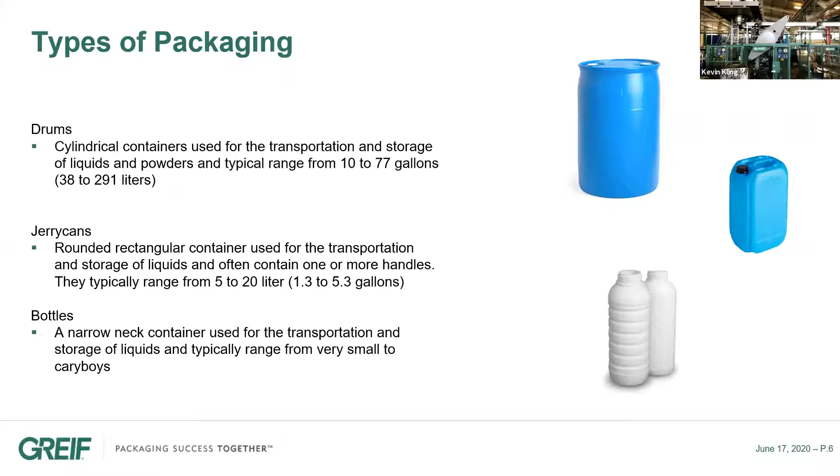Just the basics on the key raw materials. The first and most critical is the resin. I assume many of you have a car, and over time you've probably had to fix something, new tires, problem with the engine, brakes. But I suspect very few have ever had to fix their gas tank. The phenomenon is that your gas tank and our drums are made with the exact same resin, which we define as a high molecular weight, high density polyethylene. Sometimes we underappreciate the strength of that material, but it's really what gives us the foundation for the drum. Then in the case of tight heads, we have closures which screw internally.

In the case of jerrycans and bottles, we typically call them caps since they screw on externally. Then what we consider master batch is the colorant, or in the case of a natural drum, we put in a UV inhibitor to protect the polymer from degradation when stored in the sun. This gets into the question: why are most drums blue? When drums were developed around the 1960s, black was typically made from carbon black, which was non-FDA approved, and there was a lot of regrind and recycled material, so the purity wasn't there. Blue, on the other hand, was a low cost colorant that gave good polymer protection naturally. So it developed out of simplicity, and blue became the standard in the industry, and it's continued to be that ever since.

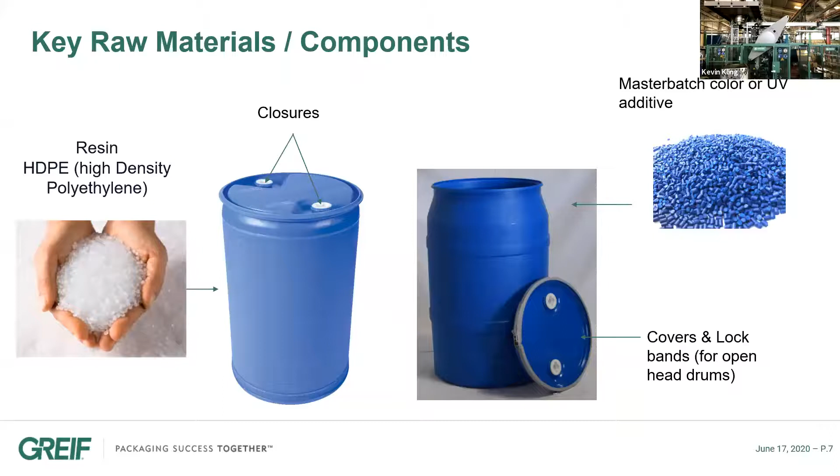Thank you, Kevin. So you already mentioned the colors and the fact that the majority of plastic drums are blue, covering around 80% of total production. But blue is not the only color we use for our containers, whether jerrycans, drums, or bottles. Blue, black, white, and natural are the four standard colors for the industries we serve. But we produce many other colors, because customers now want their brand reflected in the visual color of the drum, and we produce around 8 more colors beyond the 4 standards. This covers any customer needs and lets them follow their demand to be special, unique, and recognizable among others. We're able to do this without limitation, and in all sizes.

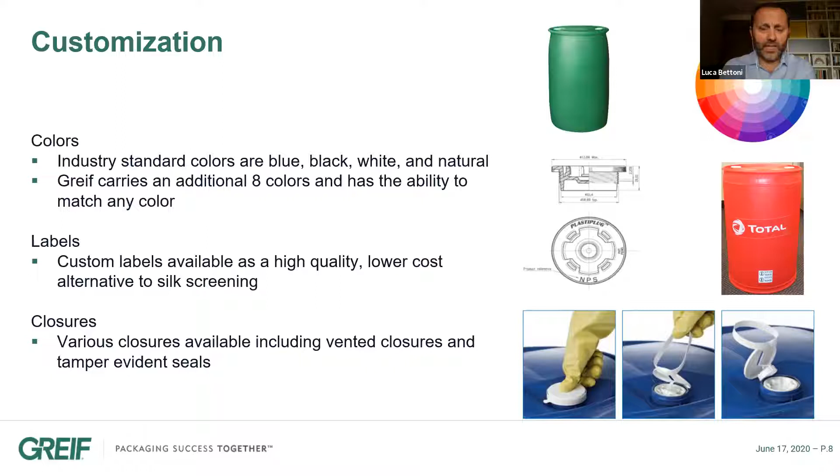Obviously, the drums can be tailored in other ways too. You can have special custom labels available that really brand the drums, as a lower cost alternative to silk screening. So you can also count on this special tailor-made request. Regarding the closures, there are many types available, with vent, without vent, tamper evident seal, and different types of necks and connections depending on the need of the drums.

The closure can be vented, as I said, because there are two typical effects on plastic products. There is the need for a vent out, to relieve internal pressure, because in some cases gas is created by the chemicals or product filled in the drums. There's also deviation in temperature, and an increase of temperature inside, especially under the sun.

And why venting the other way? This is to relieve external pressure. There are some solvents which need air from outside, or there's a difference in temperature when you're filling hot and then cooling down the product. If you close it at that point, there is the risk of implosion, and venting avoids this type of effect.

And then also why the vent during the use, because especially with the small packaging like jerrycans and bottles, which are usually used by hand, you need to have something to have a flow very smooth during the emptying. And this is why we have special inserts in our neck in order to avoid the product to have the glug effect and the waste of product as well.

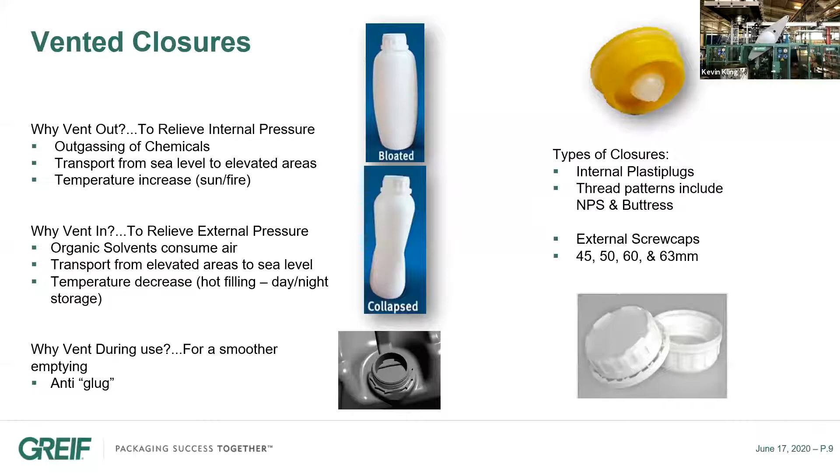Thanks, Luca. One of the most common issues we see here is hot filling applications. So that vent, oftentimes when there's a problem with the packaging or customers having issues, that typically is it, where we see a hot fill application not allowing the package to cool, and then putting the closures on and putting them in stacks. So various needs, but that would be the most common that we see.

Now we want to talk about the types of molding processes, as it really pertains to industrial packaging. And the first is blow molding, and we consider blow molding a process where we make hollow products. Really the key to blow molding is the air. The air is used to inflate a plastic tube and push it out against the mold. We're going to show this in more depth later. This is really the process where we're making our drums, jerry cans, and bottles.

The second process is injection molding. Injection molding is where we're making solid products. And contrary to blow molding, air is the enemy here. So if you get an air pocket in the product while you're molding it, that's going to ultimately create a brittle or a weak part in it. Common parts that we're injection molding would be caps, closures, plastic locking bands, and plastic covers.

The third process is extrusion molding. Extrusion molding is used to produce tubular products. Basically plastic is forced through a die, and as it cools, it can be cut or printed on. The most common product you think of being extruded is a pipe. But when we talk about one of our products later, the NexDrum and Valorx drum, we really combine extrusion molding with injection molding to create a drum in a different format, which gives it some key advantages.

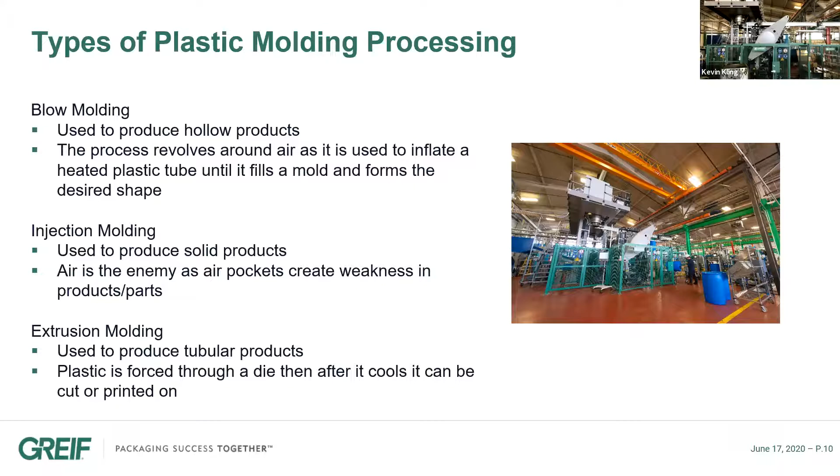Within blow molding, you've got your standard monolayer as well as a CoEx, and we define CoEx as a multi-layer application. There's different reasons why you'd want to use CoEx. Back to our example on the fuel tank in your car, that is actually a 6-layer CoEx blow molded package. The key there is they're adding one of the layers for permeation, to prevent the gasoline from traveling through the plastic to the outside.

Another application, and one that Greif is very excited about, is using it with PCR, which we define as post-consumer resin. This means when we're collecting drums and IBCs, and we know exactly what was last contained, we're able to take and sub-select from that material, grind it up, and repurpose it back in the middle layer of a drum, and then we encapsulate it with virgin material. This allows us to create a very nice sustainable story, and also prevent some of the traditional issues with using PCR, such as the smell.

Another application is purity. So you may want a drum that has no colorant in the inner layer, and with multi-layer technology, we can do this. The last would be if you needed higher environmental stress crack resistance. For example, you could get the strength of the drum grade material, but use an IBC resin in that inner layer.

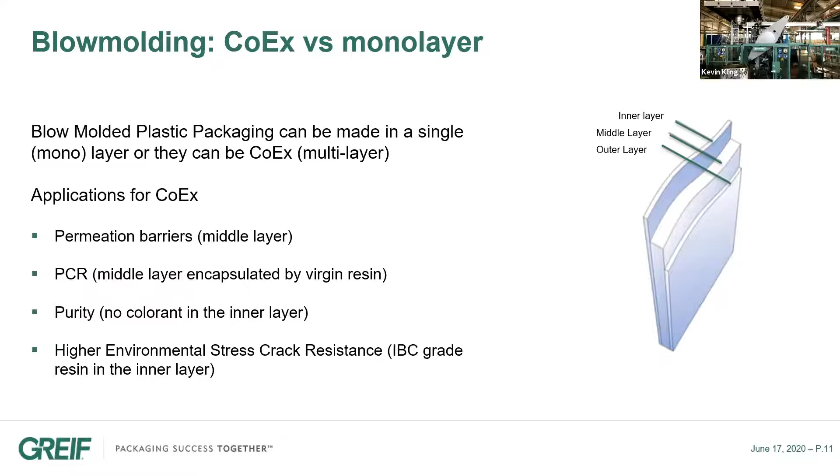So over the next 4 slides, Luca and I are going to walk you through a cartoonish look at the actual blow molding process. The reason we want to do this is after that, we're going to show a video of the process from molding through the quality checks. One of the limitations you'll see is a lot of the process, when the mold closes, you really can't see what's going on. So this just gives us a quick opportunity to first show you so you know what you're looking at.

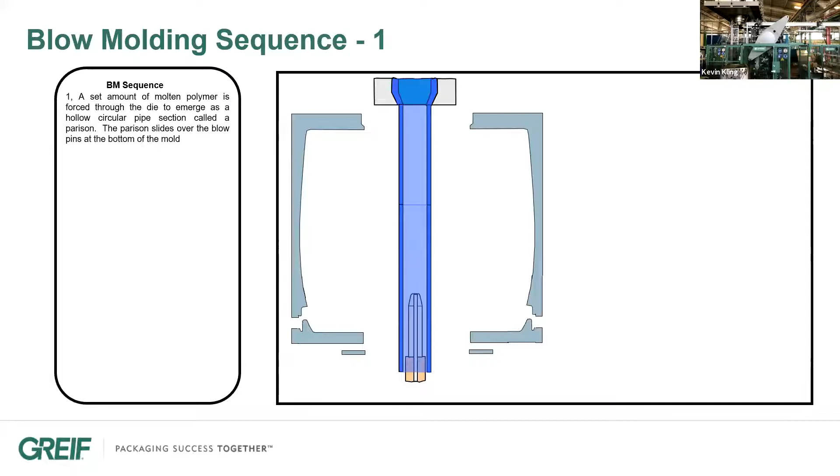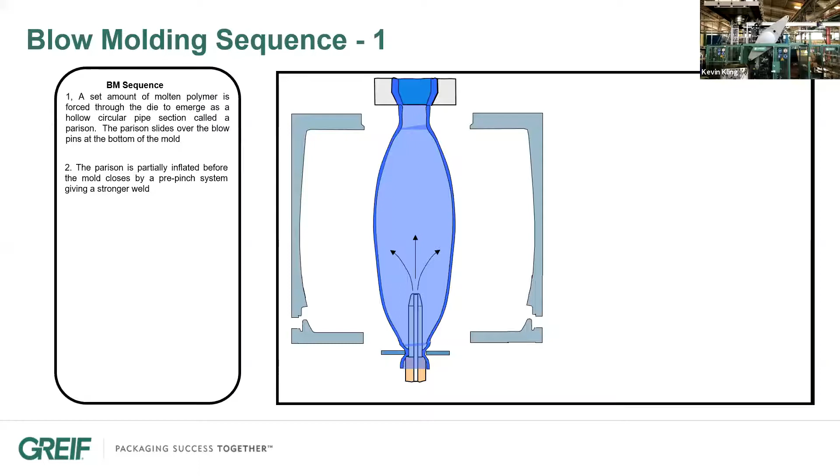The process starts as the resin and the master batch are heated and mixed together in the screw, and then they're forced through a die, coming down what we call the parison. The parison goes over the blow pins, and then the blow pin gives a pre-blow in order to help spread the material in the key areas we want. We're not making a ball, we're trying to make a cylindrical drum. In order to do that, you've got to force material into certain key areas to keep the weight of the drum down and get the shape we desire.

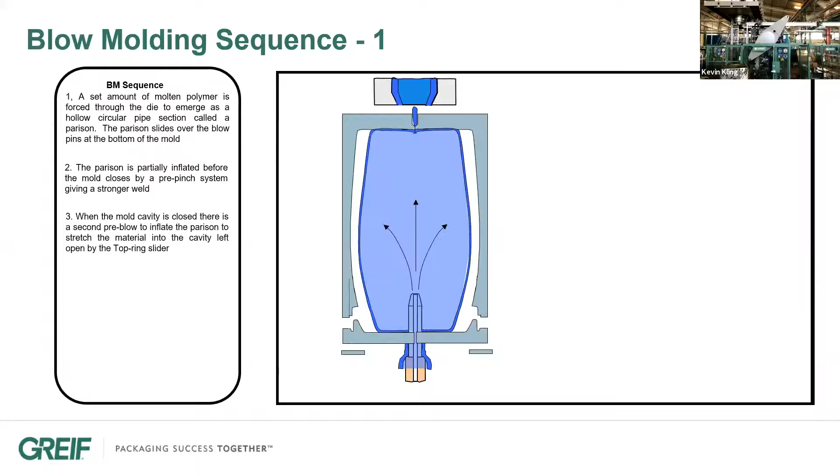At this point, the top ring slider comes in, and we're going to continue to add more air, and we're going to start to blow it into the shape you know as a drum.

Now, one thing you may notice is the drums are produced upside down. Second, the blow pin - in the case of an open head, you'll have one center blow pin. In this case, we are making a tight head drum, and so while you can't see it, picture that there's one blow pin behind the one you see. That serves two purposes: one is to help blow the air into the drum and expand it, and secondly, that's how we form the threads for the closures, so in the end it's going to end up unscrewing.

At this point, we're going to close the compression ring and form that top chime, and the drum is essentially the shape you want it to be. Now there are different processes - some machines are continuous extrusion, some are accumulator heads, so there's some subtle differences in the process at this point. In this example, the mold is going to be indexed to the side to allow the cooling process to occur. In other applications, it may stay in place before the next drum is started.

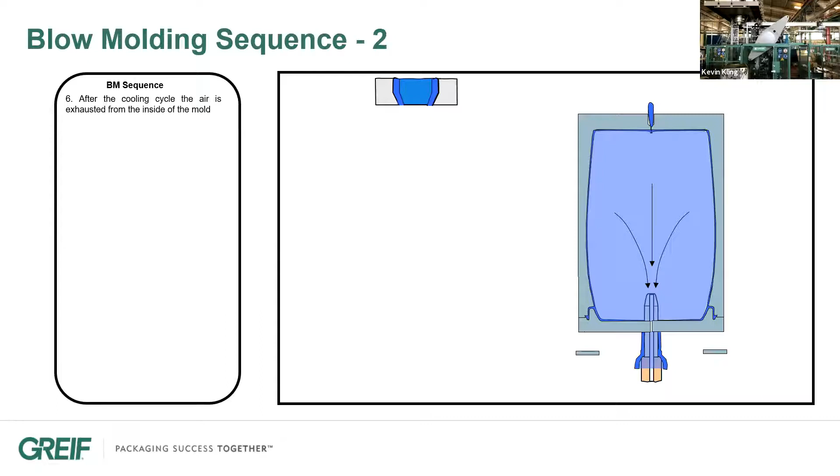So we start to reverse the process. We're trying to exchange the hot air in the drum with cold air. At the same time, we are circulating chilled water through the mold, as everything is about trying to take it from 400 plus degrees down to ambient. The quicker you can do it, the faster the cycle time.

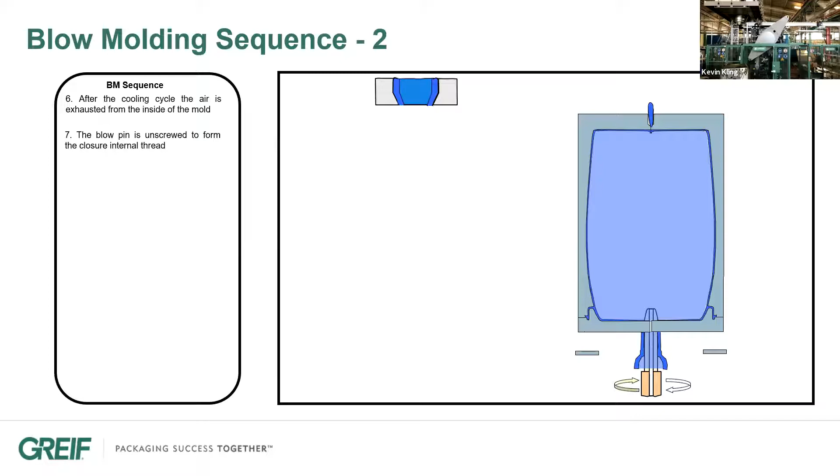The blow pin now gets unscrewed, forming those threads and making sure that we don't compromise them. Then we're going to start to open up the top slider, and at this point you'll notice that the flash on top is handled by a gripper. In the case of automation, you may automatically deflash it - when we show the video of the drum, you will see this process. In other applications, the drum just may get dropped at this point, and you've got an employee taking the drum and manually deflashing it. It just depends on the product and the application.

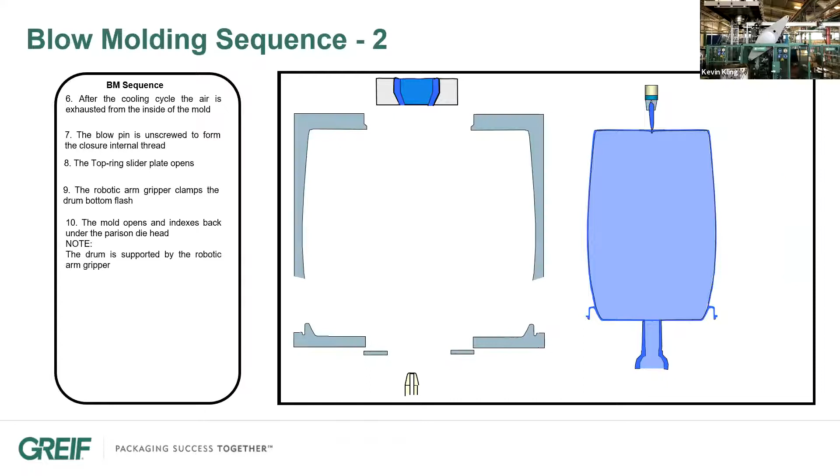Mold opens, and then basically we start the process over again.

So that's the basic process. Now Luca is going to take you through two parts: one is the inline testing that we're going to do once that drum comes off the line, and the second part is going to be just talking about the periodic standard UN testing.

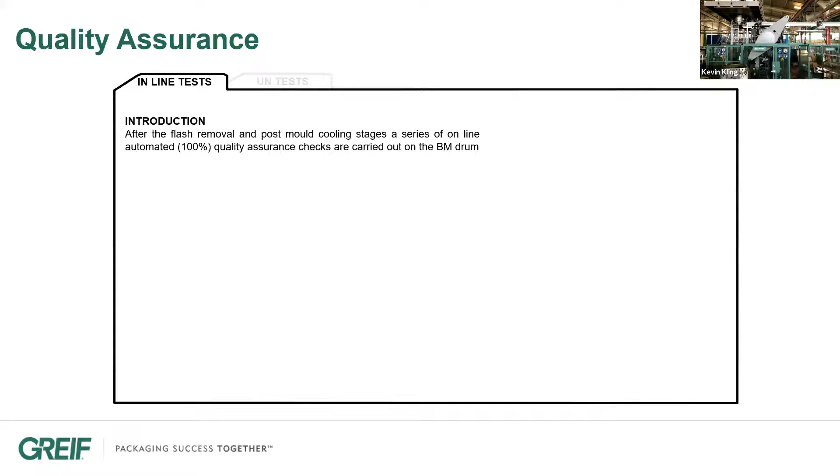Yeah, thank you, Kevin. Once produced, our product is now time to check and be sure that everything is what our customer desires to receive. First of all, we are checking 100% of our product before it's shipped to our customers, and we have different types of tests that we do on every single piece that we are delivering to them.

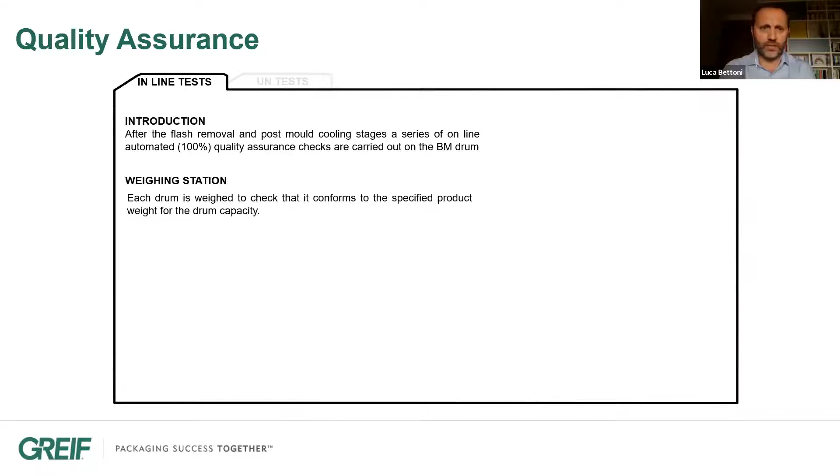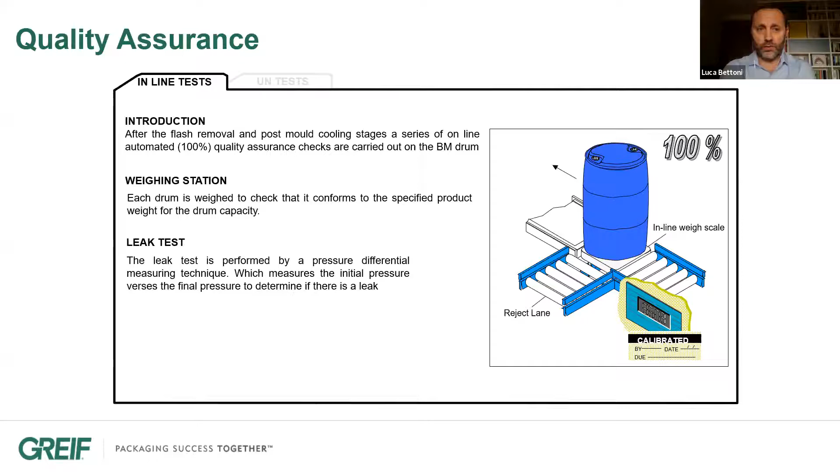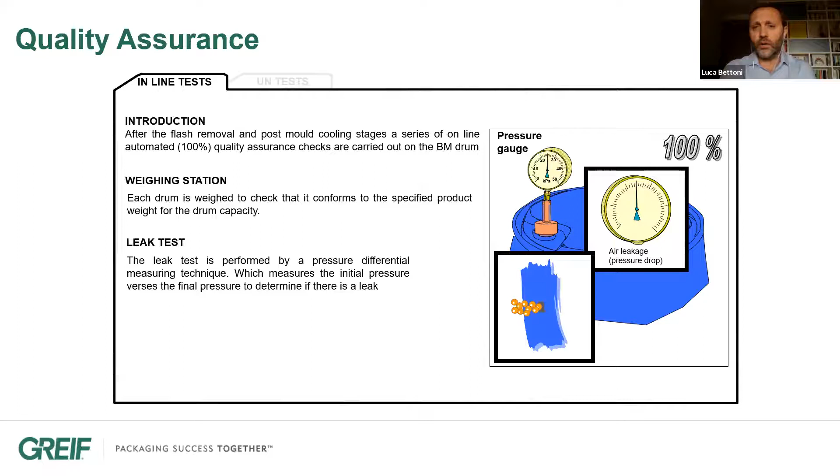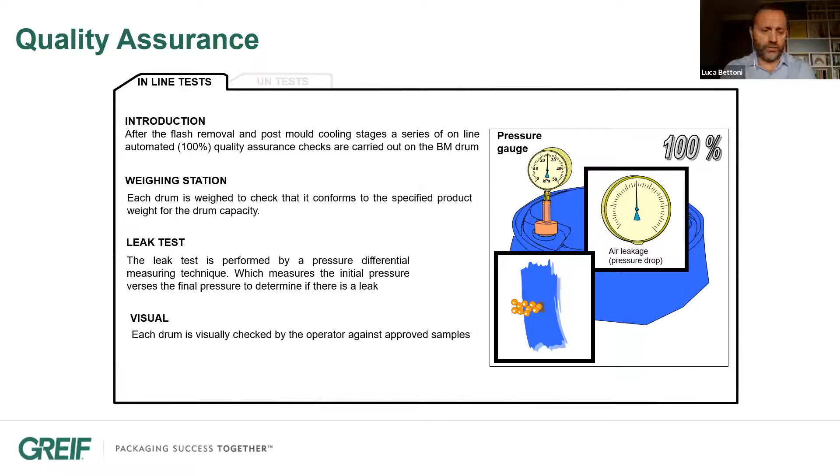For sure, those types of tests are not destructive tests, they're just checking tests. So we are measuring the weight of the product, because this is very important - we want to be sure that every single piece is the right weight needed to resist and make the mechanical performances of the usage for our customers. And then every single piece is also tested at the leak test. We have an internal pressure, and we are measuring the pressure differential in order to check if there are micro leakages, and to avoid leakages from your product, in order to be sure for you to fill and ship without any risk of losses of your product.

And then we have also a visual check, which is very important, by the way, because in this case we need to see if there are no flashes still linked to the drum that can create some problem, especially in putting the cap seal on the neck, for example. And then if there is no discoloration of the drum, in order to have a visual effect which is in line with the expectations of our customers. And then if there are no distortions or visual effects on the surface of the product.

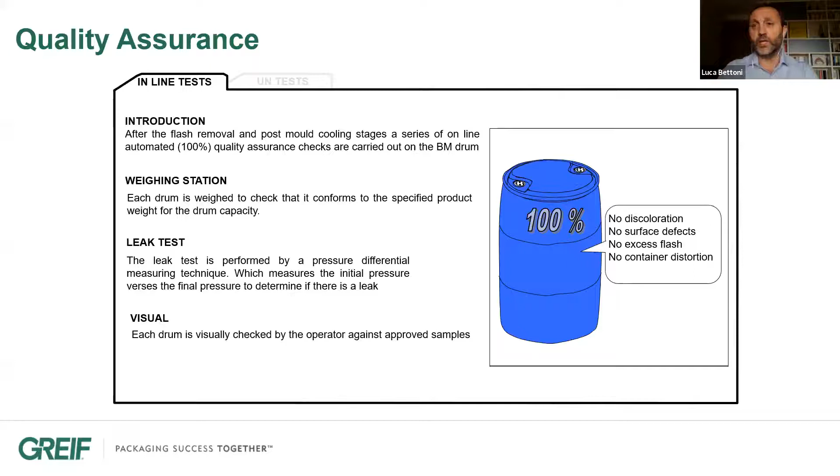So this is really for checking that what you are receiving is exactly in line with your expectation and what you need to do with our packaging.

Then there's something different we're doing with the UN test. The UN tests are basically disruptive tests, to check if the performances considered ideal for the drums or jerrycans we're delivering to our customers are indeed in line with the performances we need to achieve.

There are different types of UN approval levels. What is produced in plastics is identified with an H. For example, a tight head drum is identified as 1H1, or an open head drum is identified as 2H1 or 1H2, depending on the type of product.

There are different levels of UN test based on the packing group of the product that must be filled. Packing group 1 is linked to an X UN approval, which is the highest level. Packing group 2 is a Y, the medium level. And packing group 3 is a Z level.

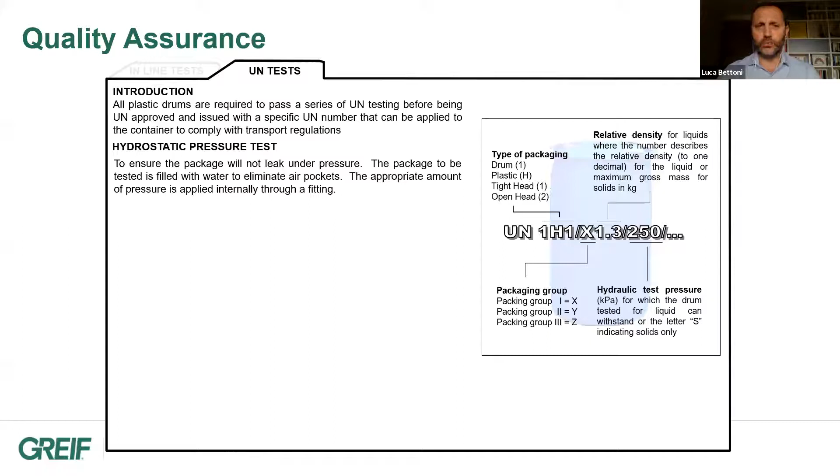So all of our products are basically tested for packing group 1 and packing group 2, including packing group 3. One of the tests is the hydrostatic pressure test, because we blow the product under pressure, and the product must resist a pressure of almost 1 bar for around 30 minutes without any leakage of the water contained in it.

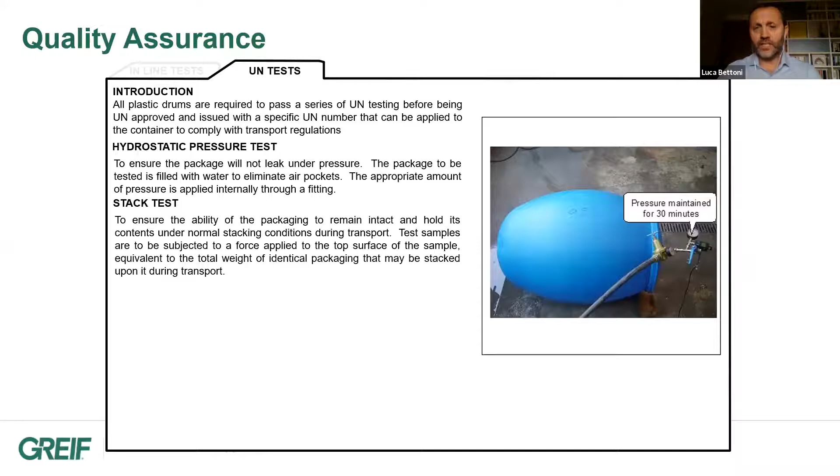Then we run the stack test, to see the ability of the drum to resist a weight, because most of our products are designed to be stacked during transport with product in them. We need to resist for 28 days at 40 degrees in this stacking condition, measuring the weight we need to resist, which is linked to the type and size, from 1 liter to 220 liter packaging.

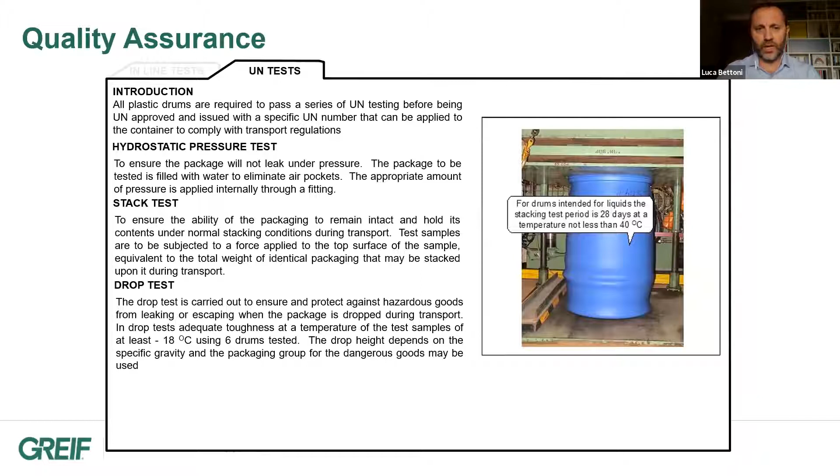The drop test is the final one, because it's a very strong and disruptive test. Usually the plastic is conditioned to a very critical temperature, minus 18 degrees Celsius, in order to bring the polyethylene to the level of maximum critical condition.

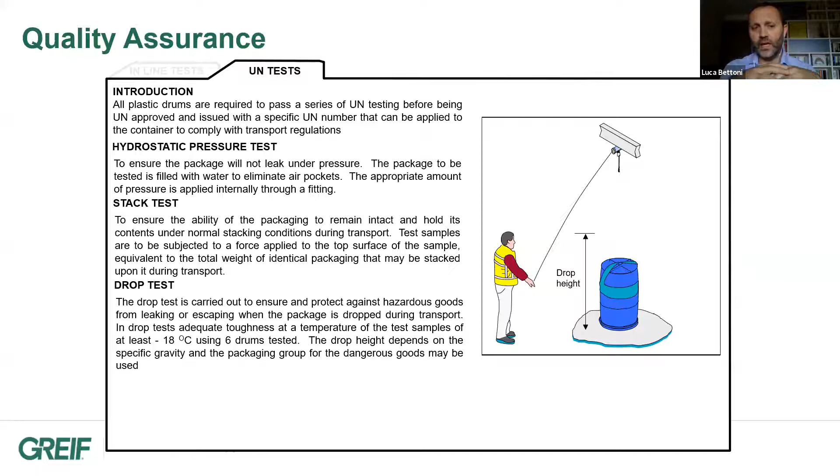Then with glycol on it - a liquid that remains liquid even after conditioning at such low temperature - the product must fall from a different height depending on the packing group you need to achieve in terms of UN approvals. For example, for packing group 1, we need to resist a drop test even close to 1.8 meters, so this is absolutely a very, very strong test.

And this is valid for all types of packaging, including IBCs, by the way. There are also different angles that must be considered for the drop test.

Most of those tests are usually made with water or glycol, like the drop test. But before that, the packagings are conditioned with the 5 standard liquids, to check the chemical compatibility of our product with what our customer needs to fill. We consider the conditioning, and the plastic must resist those tests after a certain time of conditioning, where those chemicals have time to attack or, in theory, create issues on the polyethylene. We need to resist also in this case.

Those 5 standard liquids, I would say, cover 80% of the total chemical products. For some products not linked to standard liquids, we run specific UN approvals depending on specific liquids, to be sure we are covering other products not linked to what are called assimilation products.

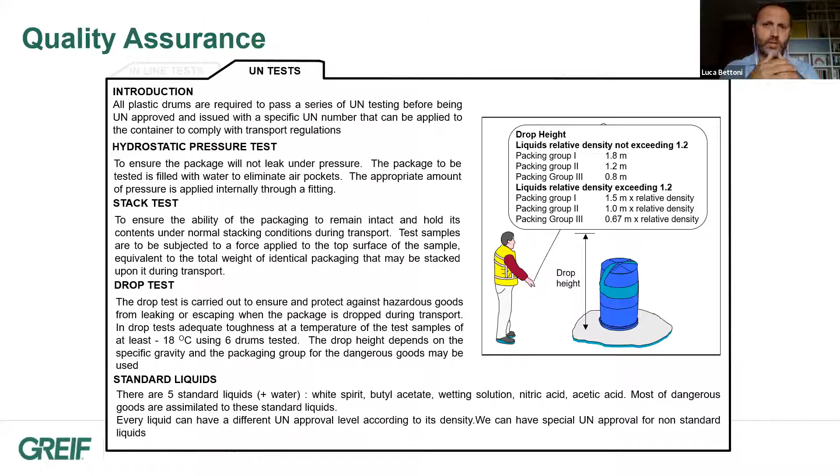So you can ask and reach out to us in case of special needs, and you can also ask at any time your account sales manager for indication about the assimilation between your product and the packaging you would like to use.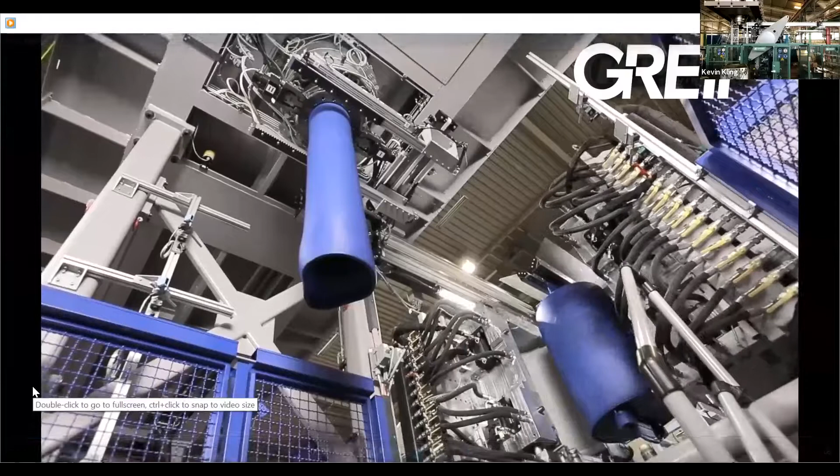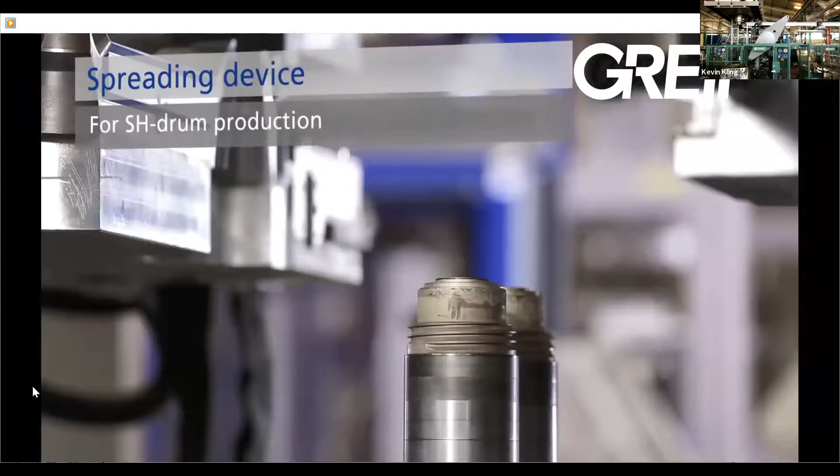Again, we wanted to share with you that Greif invested last year in 2 new state-of-the-art 3-layer Kautex blow molders. Here we're showing one of those blow molders in process. This is still at Kautex with full automation, but it gives a really good depiction of the process, as you can see the drum being made.

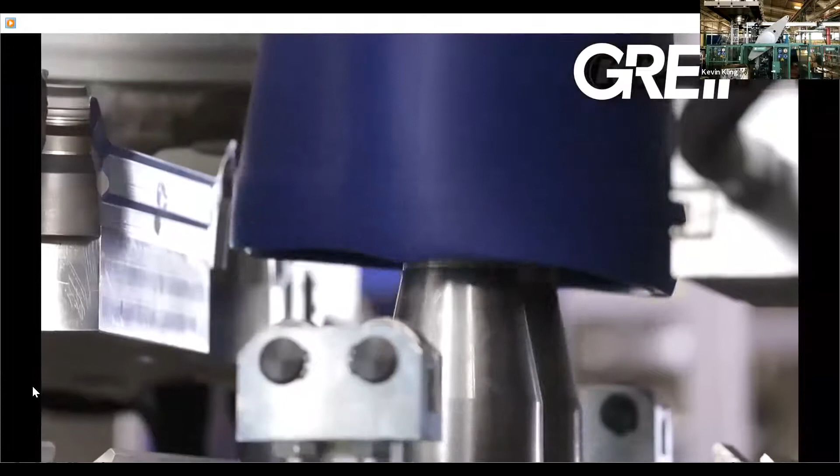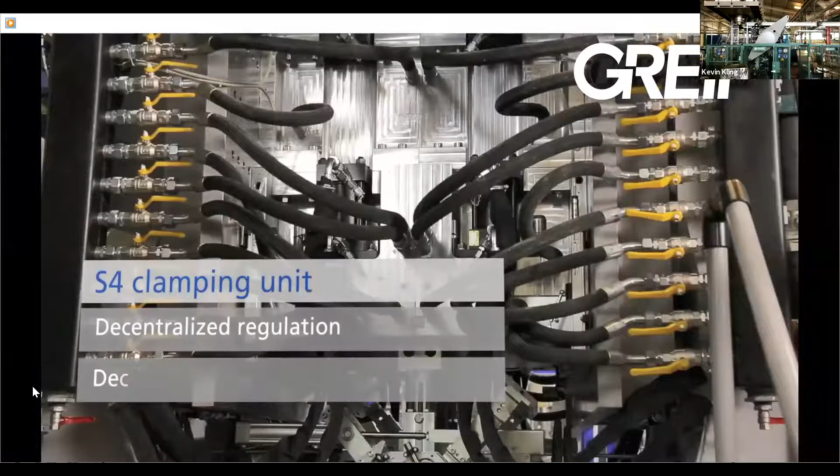So here's a better visual. You can see the 2 blow pins. We'll see the parison come down, and then you can see the process with the stretch, the pre-blow. The top slider ring is now going to go up, and we're going to start forming the drum. All the hoses around are for the chilled water, for the cooling process, as we're trying to work on and improve cycle times constantly in order to maximize throughput.

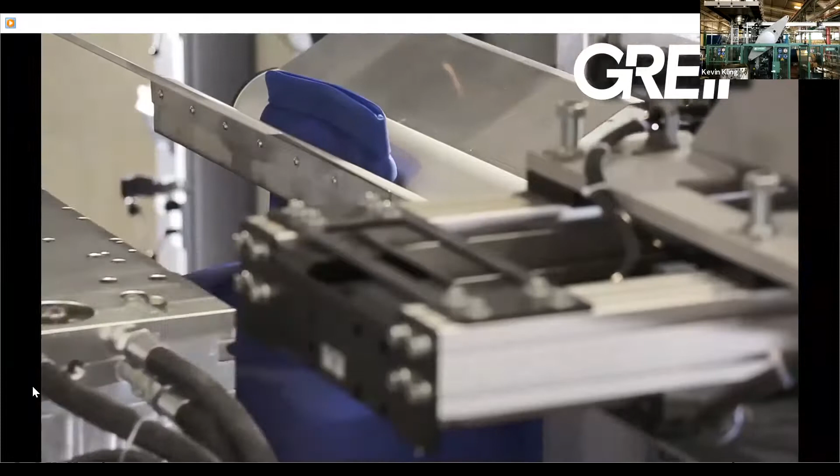In this case, we do have full automation, which is a trend we think will continue to advance, particularly with COVID and the need to distance workers. If you can do it with automation and no employees, that's much better.

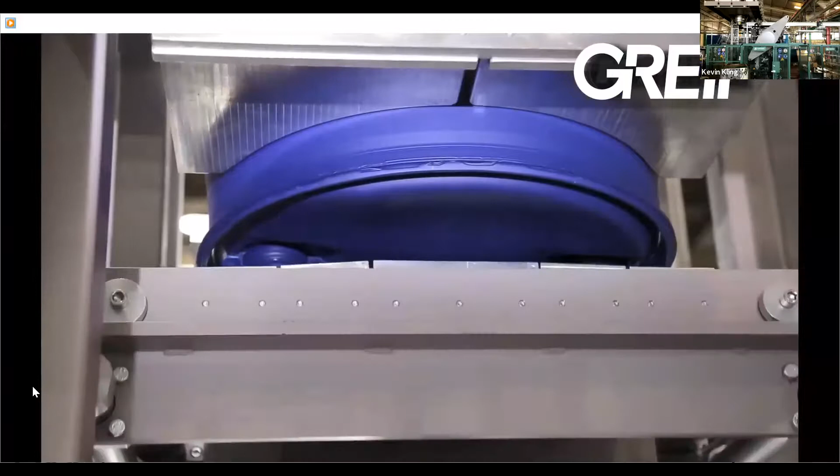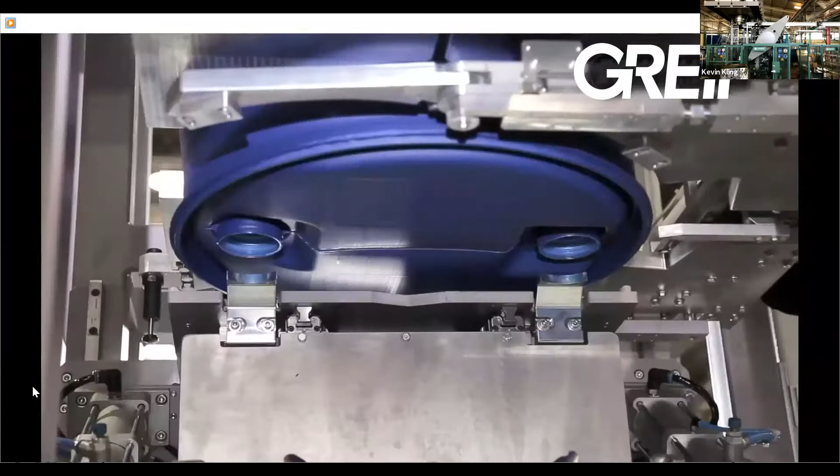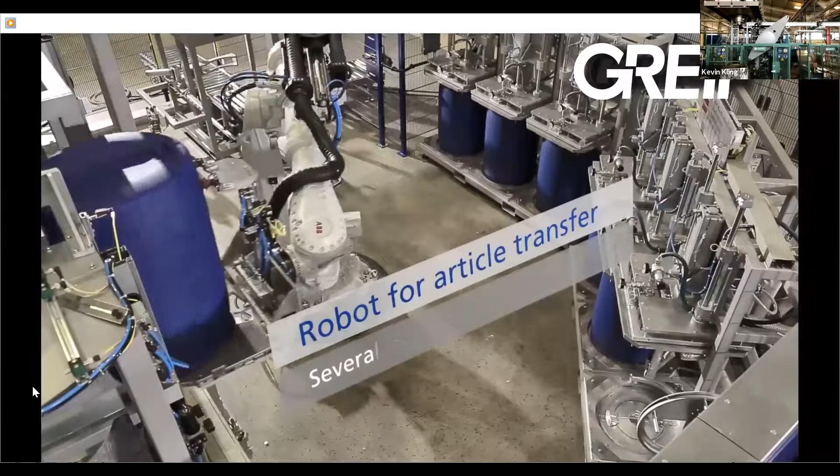So there we've just removed the top flash. One interesting aspect of drums that not everyone's aware of: your standard drum has about 20% internal flash that we regrind and put back in the process. When we test drums, a drum is typically stronger with a small amount of regrind in it than if we were to use 100% virgin material.

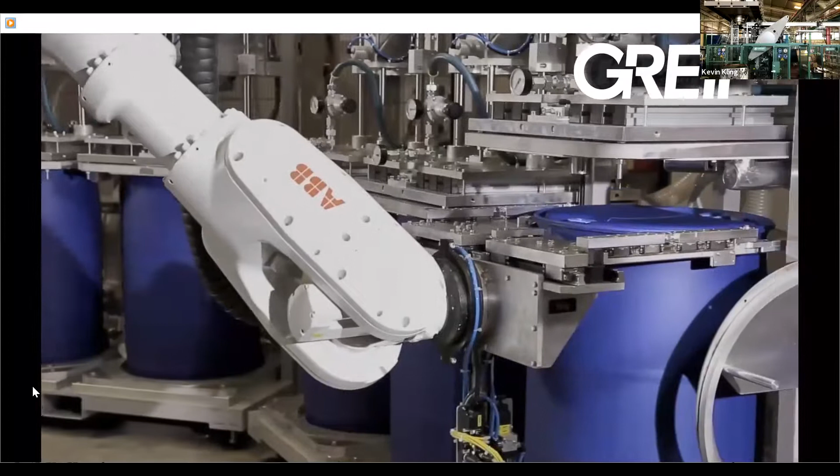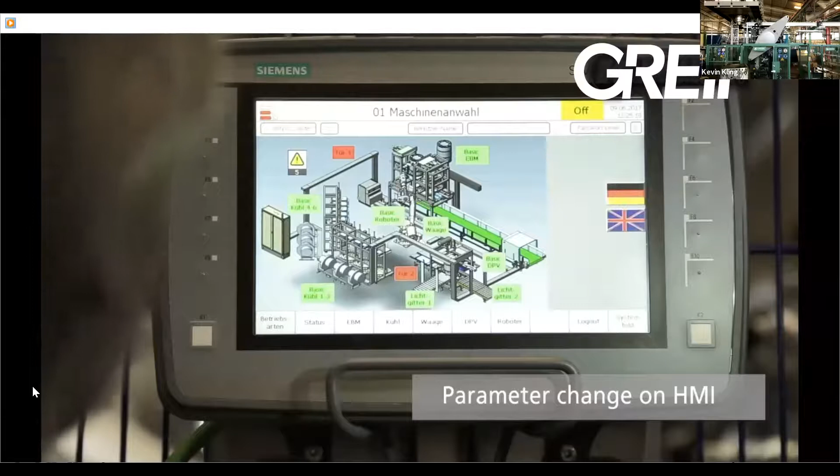Here in the process, you're seeing the drum indexed into what we call PMC, or post-mold cooling. Post-mold cooling is a process to control the shrink of the drum after the manufacturing process. At the same time, we can also check for any leaks.

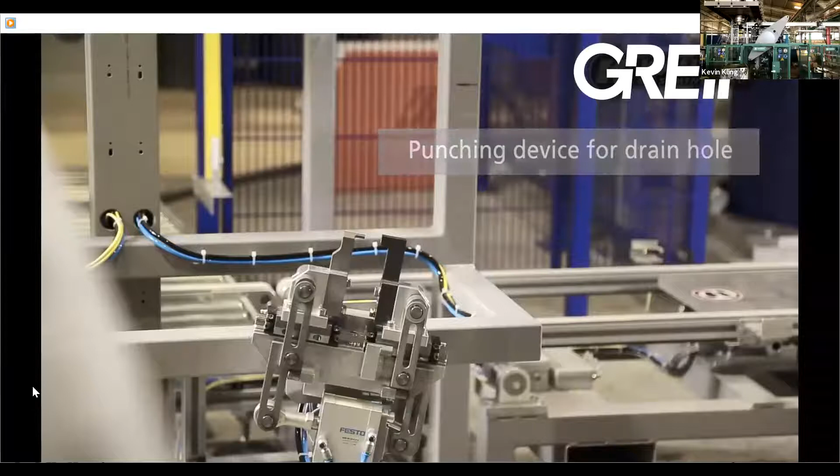From there, the drum's going on to get the weep hole punch. This is in case the drum is stored outside, in order to allow rainwater to drain off the top of the drum.

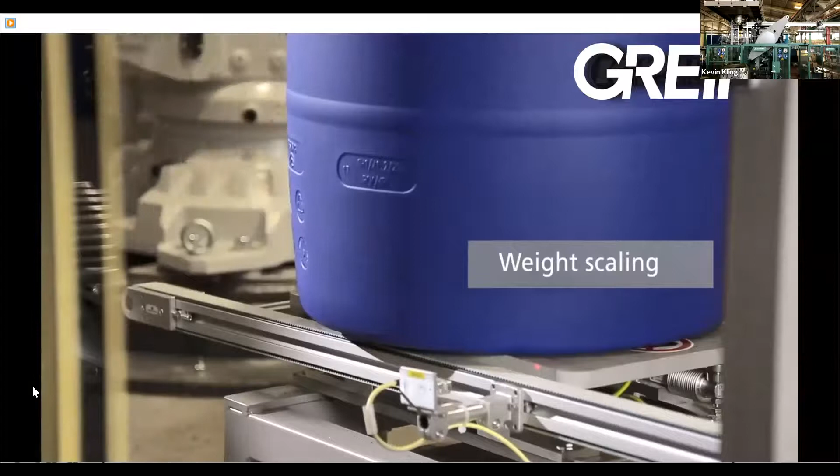Now we're doing the weight check. And then here we've got a final evaluation.

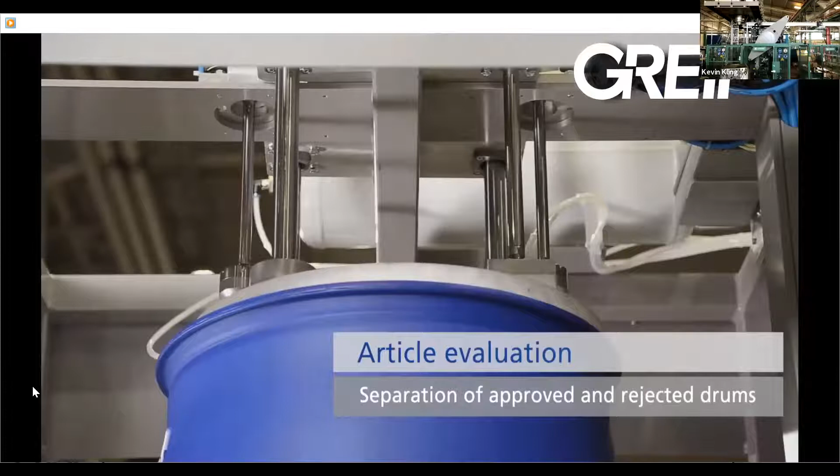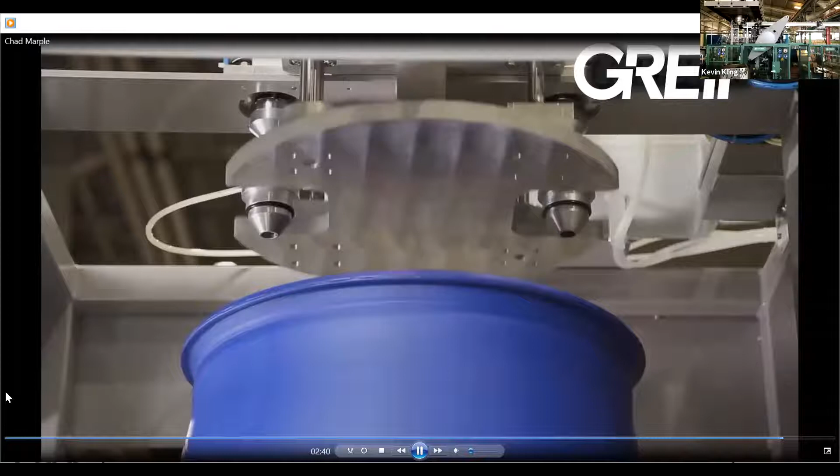You will notice they're still at the end of the line. We haven't figured a way to get out of still having a human being do the visual inspections that Luca mentioned, making sure that the flash and everything else was as expected.

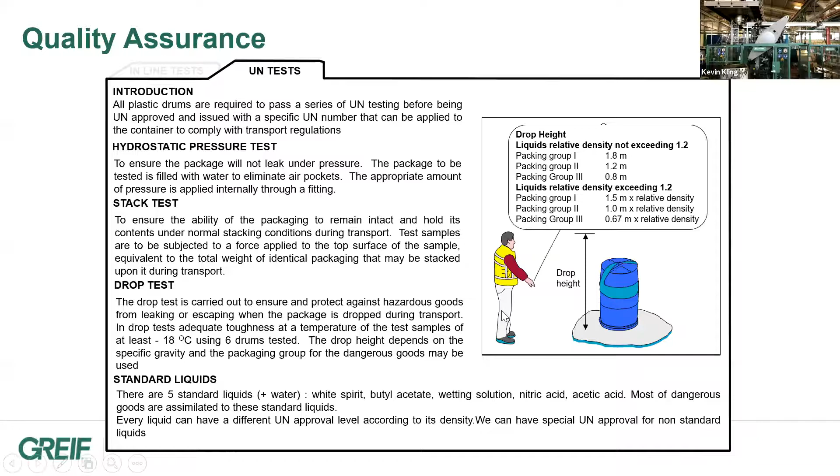Kevin, we have one quick question. They just want to know if this process is identical in all of our plants around the world.

It's a good question. I would say the process is similar. The checks are all there. Different applications have slightly different equipment, so it wouldn't be a mirror image from one to the other, but the concepts would be the same.

Yeah, also the technology here is evolving, also in the blow molding. So every producer is now also offering Greif improved technologies. When we are investing, like the machine that Kevin just showed, this is the latest state of the art. Another machine in another country, installed maybe 3 years ago, is slightly different, but the concept, as Kevin said, is absolutely similar.

Thanks, Luca. And then one last question before you get into the product portfolio: what's the resin feedstock for HDPE?

The resin is high density polyethylene. With that being said, the main feedstock is ethylene. A lot of times if you're trying to understand the cost for manufacturers, ethylene is often the number one tracked raw material. With that, of course, there's a correlation to natural gas and oil, depending on the region. North America is deriving more of their ethylene from natural gas, whereas, say, China is dominantly coal, and other areas may be more oil-based.

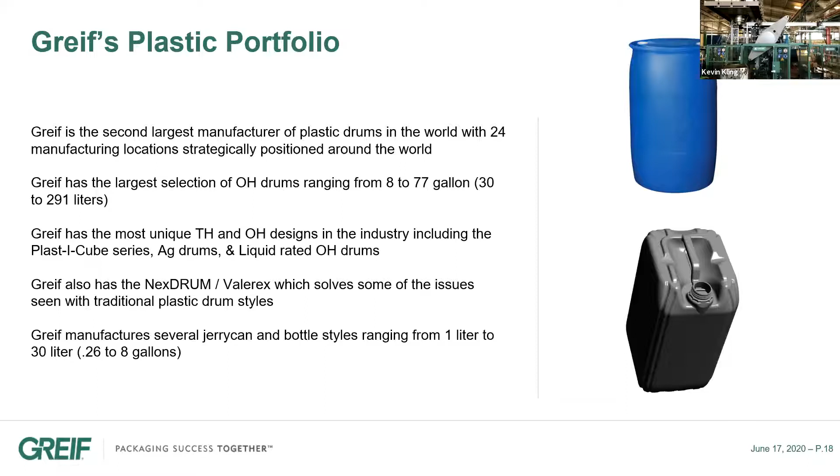Here's just a quick look at our footprint. Right now we have just over 100 blow molders, not including what we use for IBC. We vary from region to region, and again it comes back to where we have a need by a customer. We will put in a production site in order to support you.

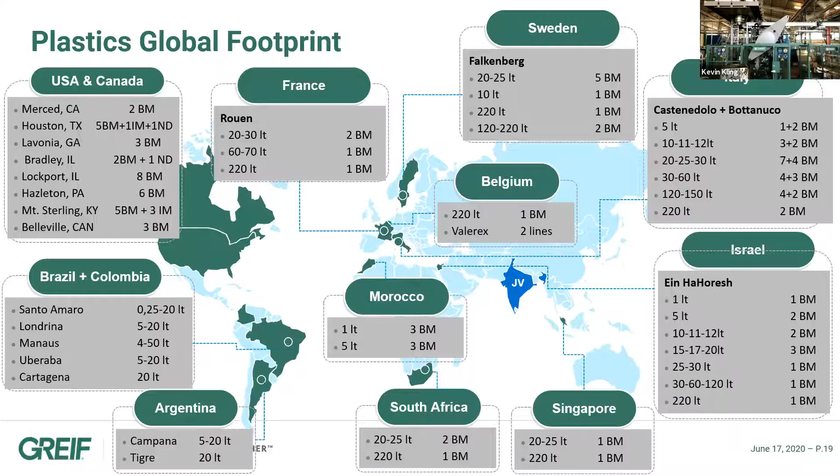So now we're going to talk about the tight head plastic drums. When the drums were developed in the 60s, some of the key features were they were lighter than steel drums and easier to handle. Some of the keys to that were because they didn't rust, dent, or peel, as well as they're inert to extreme pHs for products like acids. They continue to expand as they can be cleaned, reconditioned, and repelletized, and ultimately used back in the process, including some products we'll talk about in a little bit.

The GP, or General Purpose Series, has 6 main sizes. The key to these drums is they typically have a large molded ring at the top. We often refer to that as a chime. Some of you may know it as the L ring, which was kind of the industry standard design originally produced. In addition, they've got a sump well in the bottom, and between the rolling hoops on the side and the top, there's a protected area for putting labeling.

Similarly, we have the Plast-I-Keg series, and these range from 8 to 20 gallons in North America, and then 50 up to 120 liters in Europe. The use is the same. The one difference is with the smaller sizes, we commonly have either a molded-in handle or an exterior handle that we've put on top of the drum to make it easier to maneuver and use.

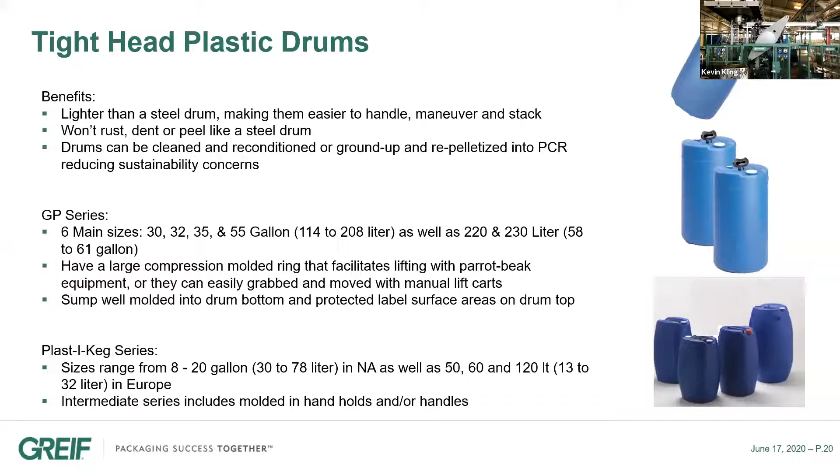So now we talk about the NexDRUM. This is the drum that we extrude like a pipe, and then we injection mold the top and bottom. The key advantage to this is the process is a lot more precise. If a standard drum is 20 pounds, the NexDRUM is around 18 pounds, but has significantly increased performance.

On the open head version of the NexDRUM, we have stacked up to 10,000 pounds, compared to a standard 4,000 to 5,000 in a typical drum. So again, performance is significant. It does have a foot ring, so stability, particularly on automatic fill lines and conveyors, is better. And because the walls are so smooth, it resists chemical stress cracking much better than standard blow molded drums.

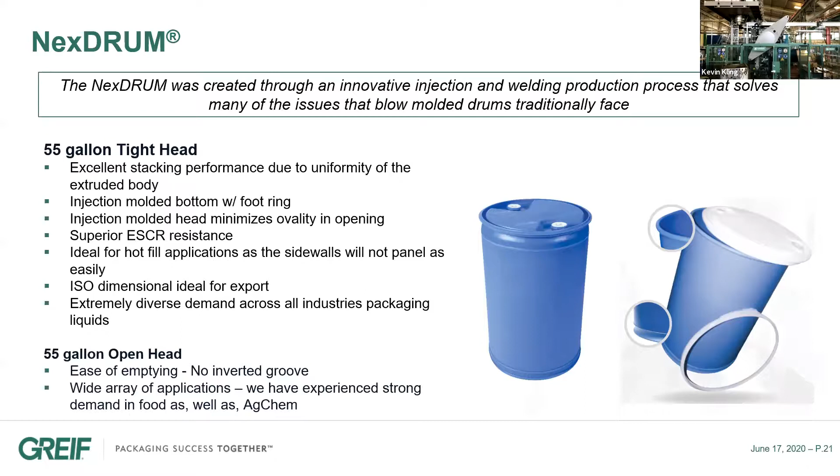Switching from tight heads, which we mentioned earlier is commonly liquids, to open heads, think of more powders and solids. We've got quite a diverse portfolio. One thing I want to point out is, as Greif grew through acquisition, we have some different series of drums. We have the POH, which is our plastic open head, OS, which just stood for open head straight sided, and OK, which still makes me laugh today. It just stands for an OK drum.

Really, the concept's the same of these ones. They're there for when you need an open head drum and want to be able to stack. And then it just really comes down to what size you need. In addition, we have the open head 55-gallon foot ring drum, and this is the number one open head drum sold in North America. And then the standard logic is solids going in open heads.

We also have the LR35, which is a liquid rated 35-gallon drum. We also have a tapered version of a liquid rated 30-gallon drum, and we're in the process of developing the open head 55-gallon foot ring drum for a UN rating with liquids.

Within all these drums, you've got various options for covers and lock bands. Could be steel, could be plastic, could be bolt ring. And some you want flat covers, others are bung and vent. So it just comes down to customization and what the customer needs.

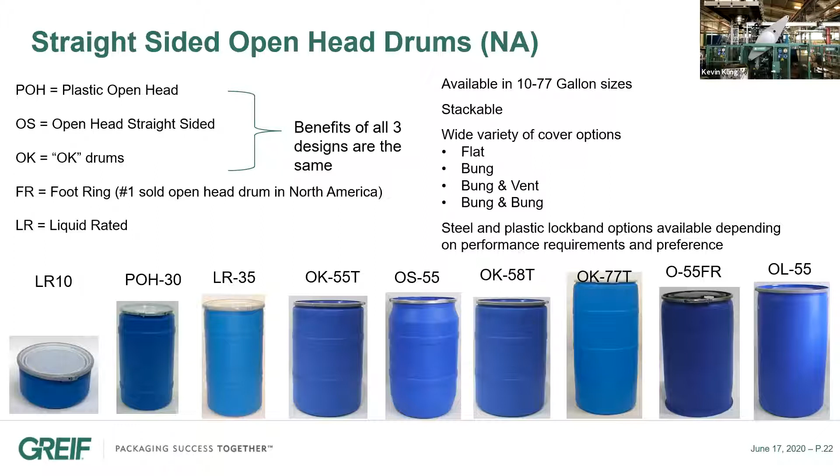Thank you, Kevin. This is the portfolio of the open head drums in Europe. Just a very quick point, the tight head drum is absolutely identical in Europe, North America, or Asia, because it became a standard. So the 220 or the 55 gallons tight head is almost the same. Different is the shape of the open-head drums. The open-head drums for historical reasons are made in a different shape in Europe, which is more rounded. And we as Greif are producing basically all the sizes that are required in the market.

So we are starting from a very small drum, which is close to 6.7 liters, and we go to 28, 33, 60, 150, and the 220 open-head drums. So the small drums are obviously available with the lateral handles, because they can be moved by hand by operators. So 33 liters by 1 operator, or the 60 liter by 2 operators. So that's why 2 handles.

And then the 120 liter is available in the round shape, or we have also this special square shape, which has been designed in order to fulfill perfectly the ISO container, and then to increase the quantity of your product that can be shipped in a container in those type of open-head drums. So this is improving the quantity from 108 to 144 open-head drums, basically with the same size, but with the best and the perfect occupation of space. There is also the opportunity to have in the lid some small opening for customers which are intending to fill with liquids.

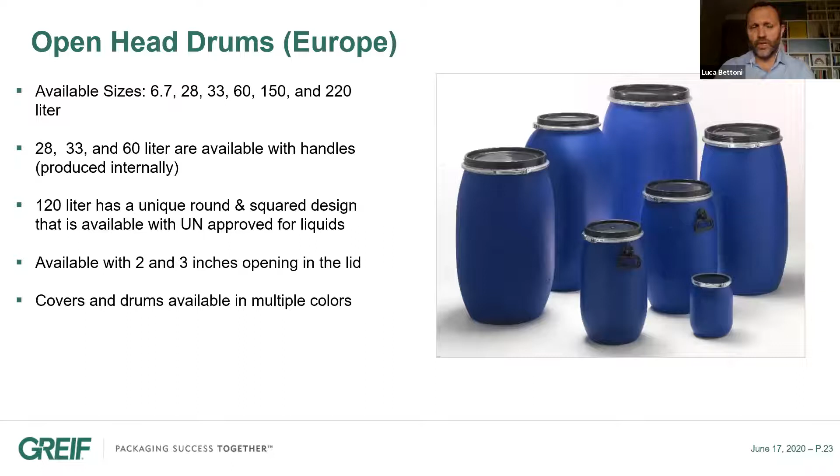Because if not, the open-head drum is mainly used for powder or solid products. Also in this case, you can count on different colors. The standard is blue, but you can have it available in different colors depending on your needs. So this is really the standard in Europe.

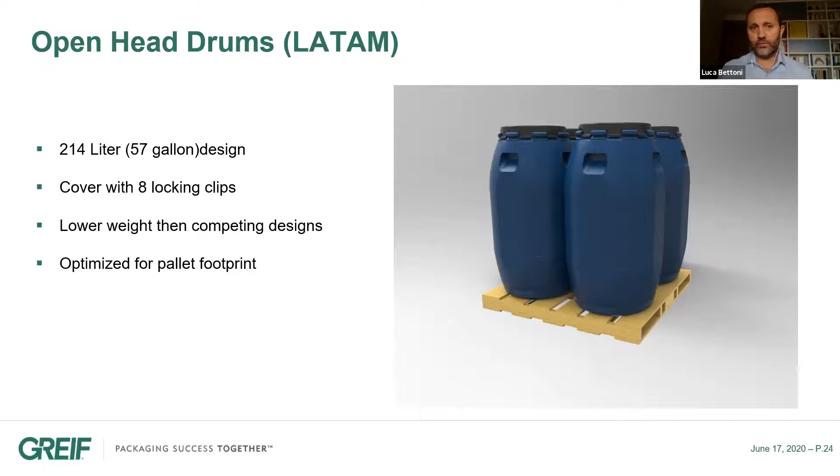In Latin America, this is a quick update about one of the latest developments we've achieved. This drum has been designed to increase and reduce the space of occupation, and to reduce the weight of the drums while maintaining the same performance. With this square or semi-square design, we've been able to reduce the weight of the drums while fulfilling the mechanical performance required for stacking 1+1 in ISO containers. This is optimized for the pallet footprint, so you can reach out to us for any specific desire for this type of drum.

I will hand over now to Kevin for the Tapered and MB series.

The key advantage of tapered drums over straight-sided is the ability to ship significantly more drums in the trailer and save on freight costs. The most common applications we see are in food. We have customers, for example, packaging peanut butter, who might send it to a company that makes ice cream. That customer wants to make peanut butter chocolate ice cream, so they empty the drum, then restack the drums, not a whole lot different than a traditional sleeve of coffee cups, and send it back to the peanut butter producer to wash them out and reuse them. We've got a wide array from 14-inch to 23-inch diameter, up to 55 gallons.

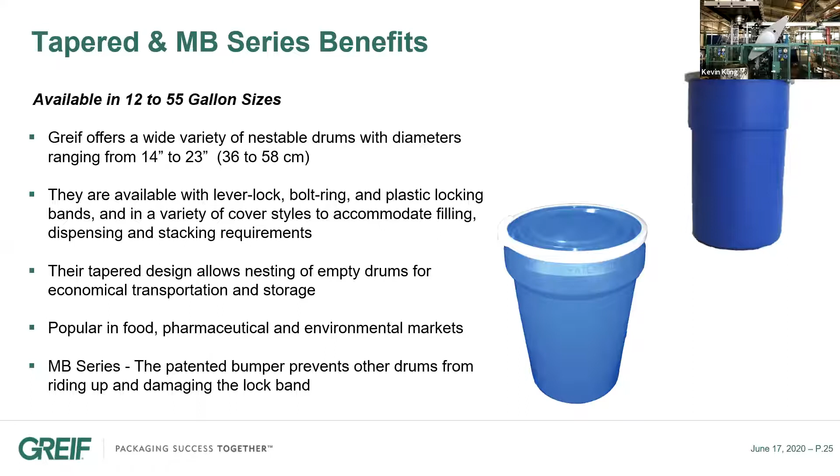We've talked a lot about drums, but there are not only drums in our product portfolio. Greif has a clear strategy to become a very big player in the Jerrycan business, and that's why, in order to achieve this strategy, we've also developed specific Jerrycans to be successful in the market. The Jerrycan is what's called JCR, our Jerrycan Reinforced.

We've developed these jerrycans to be produced globally, identically in every plant where Greif is producing jerrycans, in order to offer our global customers identical product in every country where they need it. JCR started as a project for the 20 and 25 liters, which is now installed in Israel, Sweden, Singapore, and Italy.

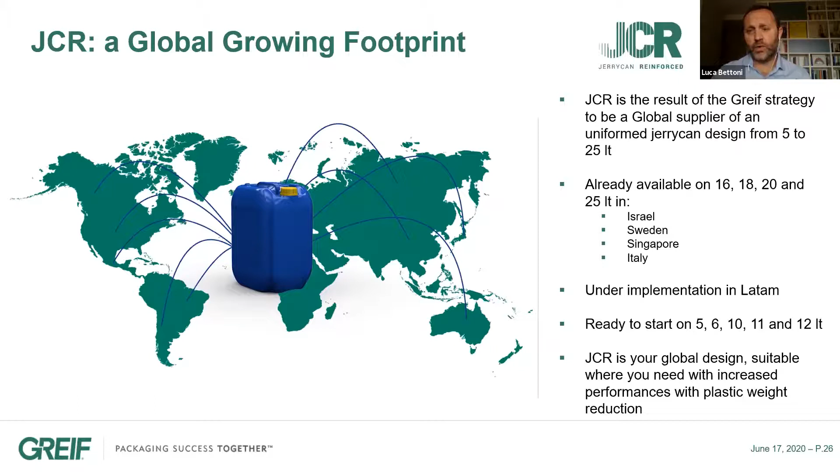With this project, we've been able to develop a jerrycan occupying the same dimensions, so it's not different compared to what you're using in your filling lines, but it's able to resist more with a lower weight. We can achieve traditional performance while reducing the total weight of the packaging by 10 to 12%, thanks to special reinforcement in the profile of our jerrycans, both in the corners and in the top and bottom. Everything is designed to resist more while using less polyethylene.

We're now implementing it in Latin America, and the 5, 6, 10, and 12 liters will follow, to have the complete range from 5 to 25 liters within the same family. This is, as I said, an innovative product for reducing total plastic consumption. You can have it available in monolayer or multi-layer technology, including the option of a permeation barrier, either with traditional CoEx technology or what we call our shield technology - another brand of product achieving the same barrier performance.

We have, as we said before, an anti-glug system directly in the neck, and the closure can be made with different sizes, different types of necks, different types of threads, with and without venting.

The final point is that JCR is also available with PCR, recycled polyethylene, what is called post-consumer resins, in order to achieve sustainable goals for us and for our customers, and be in line with our EcoBalance product line.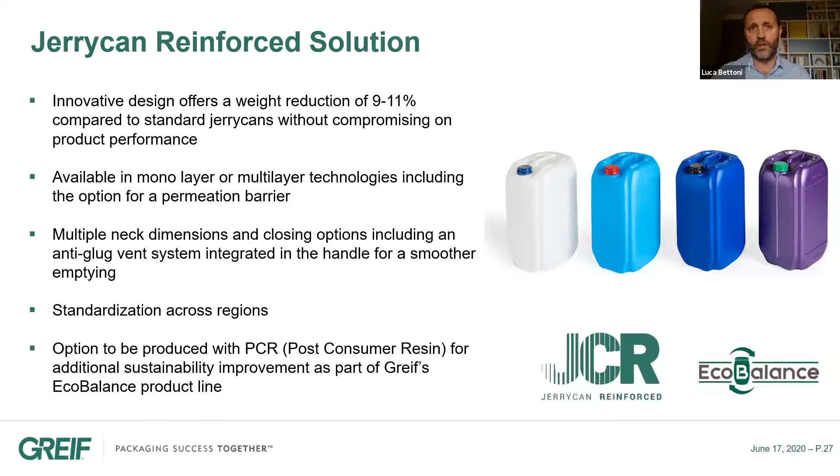JCR is our standard globally, which is now growing more and more year over year. On top of this, we have a specific family available in multiple countries of our footprint, the Agro Bottles, because we believe this is an important business for us and we want to follow its growth.

There are special requirements here, especially in the barrier effect. Basically the standards available in this market are the 20 liters that we have already seen in the JCR series, and also the 5 liters, the Agro Light. It's an innovative and sustainable packaging, with the trend to reduce the overall weight of plastics, and totally compatible with the C95 filling lines, typical for the agro business.

Another important size for Greif is the production of 1 liter bottles. The ring bottles or flat bottles are really sustainable bottles, with the aim to reduce the consumption of plastics in order to reduce the CO2 emissions in every bottle, which are multiplied by millions of pieces that we produce every year.

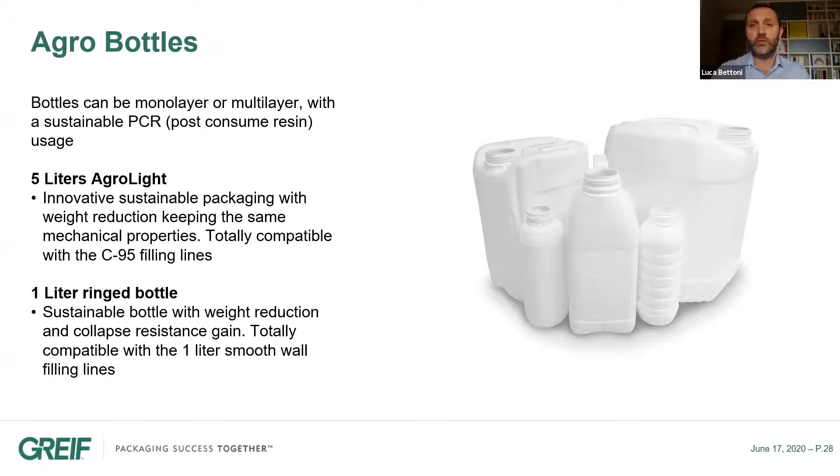As I said, there is, as you can probably see all around us, a very negative campaign around plastics, but the reality is absolutely not what we are probably hearing in our media.

Today, over 20% of drums and jerrycans are reconditioned and reused, because polyethylene has the great strength of being able to be reground many times without losing its mechanical performance. So the point is really to create a virtuous loop.

A system enabled to work together in order to increase this percentage, because the problem is not the plastic. The problem is that we are not collecting enough because we don't have a system ready to reuse or collect polyethylene immediately. Greif is investing a lot in this sense.

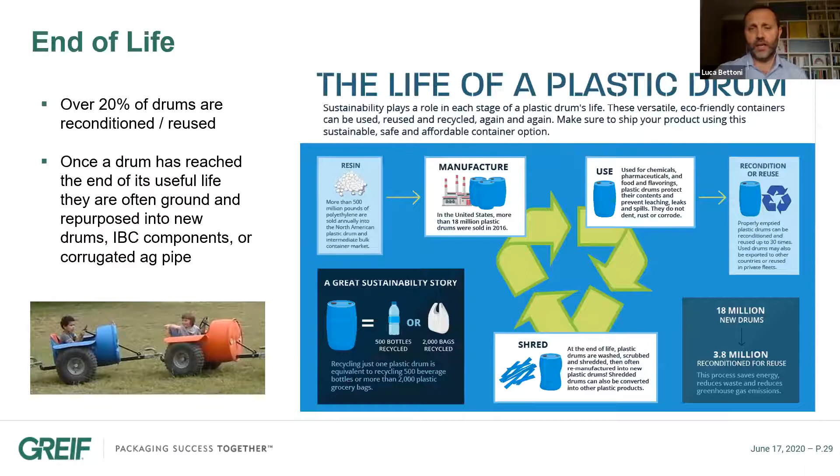We have created a special line of products called Eco Balance, where we produce our packaging with a percentage of post-consumer resins, recycled polyethylene, coming from the collection of empty packaging. It's also called post-industrial resin because we are collecting industrial packaging.

We can achieve, in monolayer or multi-layer technology, a percentage up to 75% of PCR. We can do it with and without UN approval, depending on the product our customers are filling. In this case, we can guarantee the CoEx, also the opportunity to have the inner layer in contact with the filled product made with virgin resins, and the PCR only in contact with the external layers.

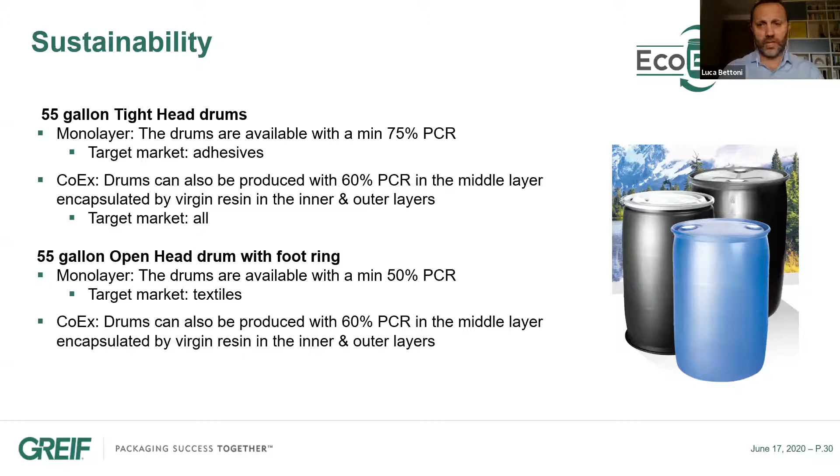So we can do it in the 220 liter series, both open head and tight head with a foot ring. Also in this case, the percentage in the open head can be 60% and 50% of PCR. And then we have also the opportunity to introduce it in other types of packaging and other sizes.

For example, this is something we are doing in North America, the 55 gallons. This slide shows what we are doing also in Europe, and basically we've been doing it for more than 20 years. We can do it in jerrycans, we can do it in drums.

And for those of you who have seen the webinar on IBCs, we have also started producing IBCs with the plastic bottle, with 60% of the total weight made by PCR, also in transparent color. The point is that, since we've been doing this for many years, we are now producing more than 1 million of our jerrycans and drums with the use of PCR.

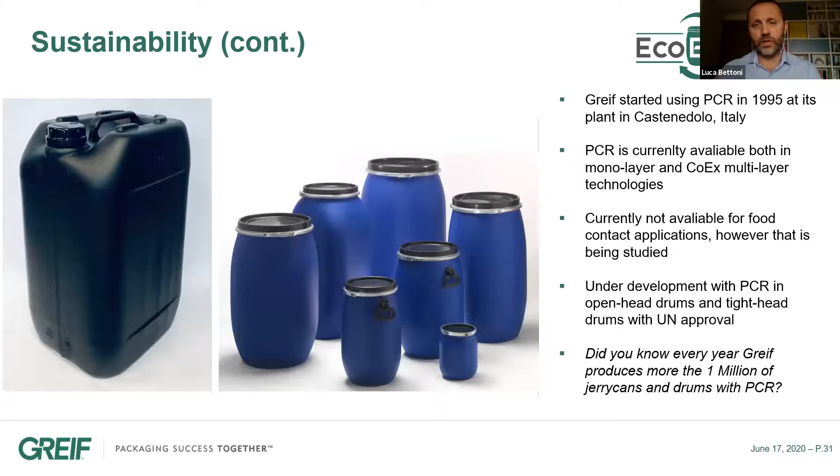The point is that we can be more successful if our customers can help us collect more. So that's really something we would like you to engage with us on, in order to create a virtuous system to collect more. The more we can collect, the fewer new resources we will need to use in the coming years.

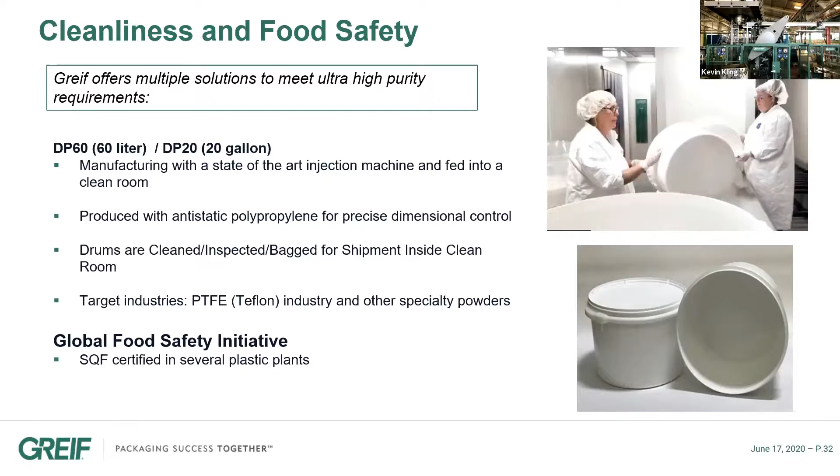In order to produce, say for example, 220 liter, 55 gallon drums in very high purity applications. We're also very focused in the food segment. We have several plastic plants, not to mention Fibre and other plants as well, that are SQF certified. This is really part of the Global Food Safety Initiative.

Just again, trying to ensure that we meet those needs above and beyond the standards which are set today in the industry. One project we wanted to highlight is we are adding a new plastic drum line in Durban, South Africa. The key here is we're focused on a food certified facility, which will be in production later this year.

They're producing 210 up to 250 liter drums, and they're focusing on the double L-ring shape. The L ring is the chime in the top, so the double L ring refers to having a foot ring, much similar to when we talked about the Valorix and the Nextrum drum earlier. Just excited about this, wanted to share it.

As mentioned, we continue to invest and grow where customers need us to, and we always love to get your feedback.

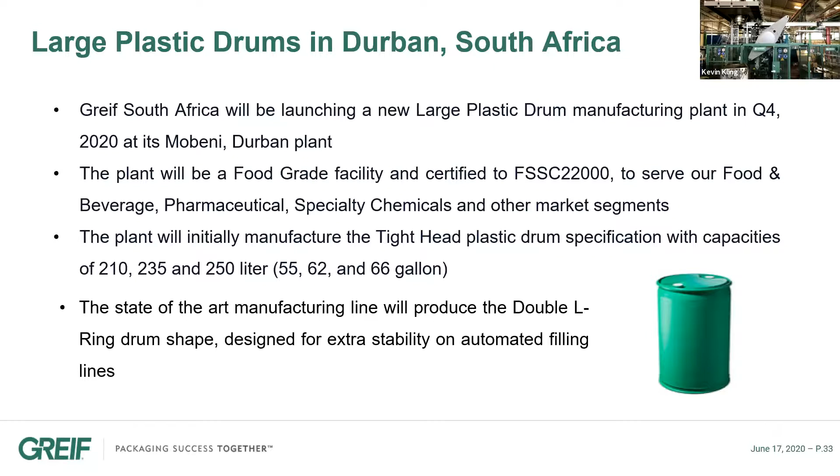So why choose Greif? Well, again, we're number one, we have the most diverse portfolio. Number two, we have solutions to meet sustainability goals, and we truly think this is where the future is going for packaging.

As Luca mentioned, plastic right now has a bad reputation. In order to reverse this, we really have to become stewards of the industry and ensure that we are finding ways and challenging ourselves to repurpose and to recycle.

Customization, you saw a lot of different packaging sizes, ranges, and types. For us, that's the most fun part of the job. You've got a challenge and we get to tackle it.

Global security of supply, with our 100 blow molders around the world, we truly have packaging, and particularly now that we're focusing on things like the Jerrycan reinforced, where we've got standards and design. And again, we've got a passion and focus on cleanliness and food safety.